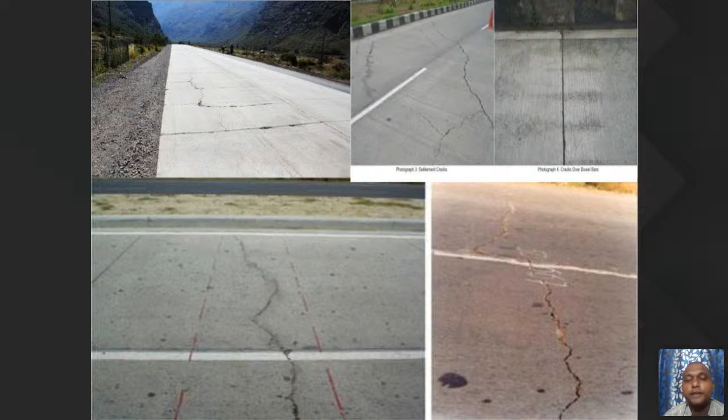Not only in buildings, if you observe rigid pavements, which are concrete roads—after some years of construction, in most cases, if you see village roads made with concrete, those are rigid pavements. Due to vehicles moving and increasing load, there is a lot of crack creation. Once cracks occur in a structure, the strength of the structure decreases gradually.

So it is very problematic, and also construction cost is more, while we have to decrease maintenance cost. Nowadays, repairing these types of cracks creates a lot of expense, and there's no guarantee whether the repair will be permanent. After a year or two, cracks will occur again. That's why we have to create a new technique, especially for sealing or healing these cracks.

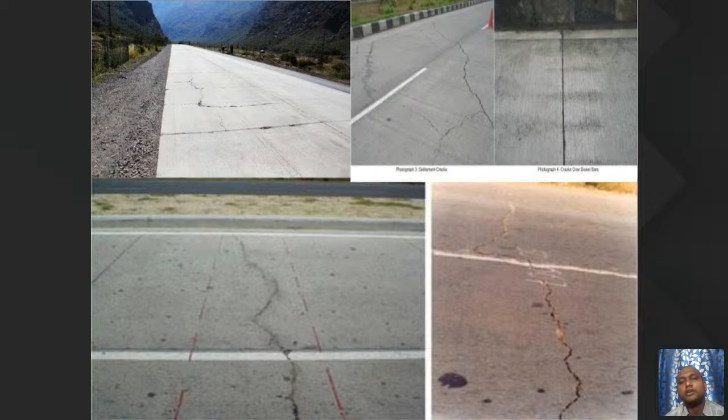We already know different types of cracks, like micro cracks or nano cracks, autogenous cracks, internal cracks, or external cracks, whatever it may be. The main motto of this research is that it's a trending topic in civil engineering. Not only civil engineers, but common people should also know regarding this research.

So let's move on to this slide, the crack repairing system. Whatever repairs we are adopting nowadays: the first is the stitching method, second is epoxy injection, third is cement grouting, and fourth is drilling and plugging. These techniques are used nowadays for RCC structures like buildings, bridges, or any type of reinforced cement concrete structure.

If you observe this, definitely these methods need labor, require a lot of material, and have labor costs—so everything is expensive. That's why we have to come up with a new technique: self-healing concrete or bacterial concrete. In stitching, epoxy injection, cement grouting, or drilling and plugging, whatever it may be, those things are expensive.

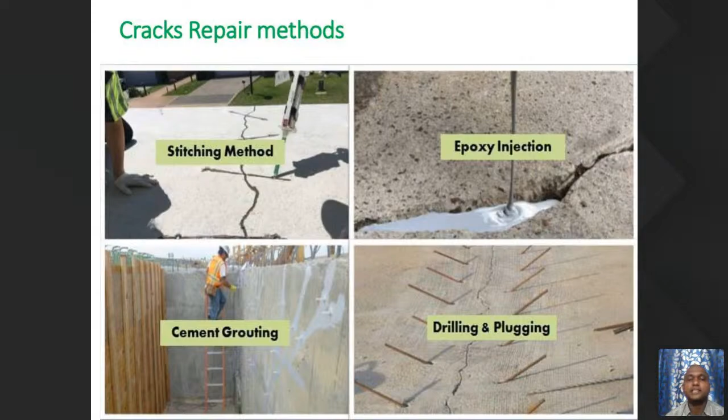We have to analyze the structure, how the crack is affecting it—everything first we have to analyze, then adopt one technique, then implement it. Nowadays, in most cases we use epoxy resins and different types of techniques to repair these cracks. So everything is expensive. That's why we came up with a new technology: bacterial concrete.

If you observe this diagram, for cracks in buildings or reinforced structures, like bridges, there's little we can do. But in a reinforced concrete structure like a swimming pool, if there's any crack, you can see stitching here, and water will move through it. The passage of water increases, creating a lot of problems. That's why bacterial concrete is a need of the hour for society.

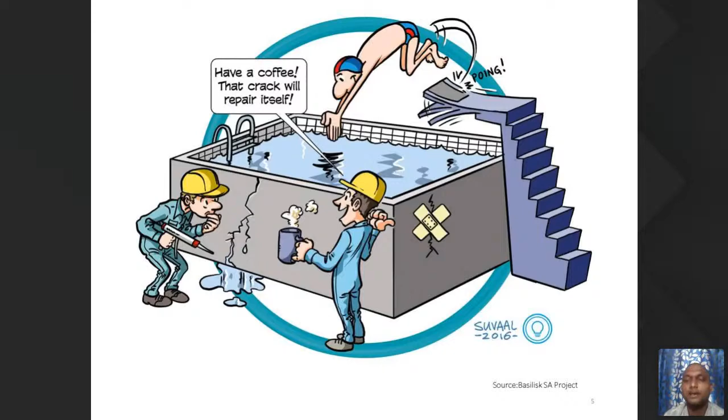If you observe this pictorial view, generally we have different types of techniques that society is adopting, as I've explained so far.

The first thing is, why doesn't concrete heal itself? That means self-healing of concrete - we have to think about that. If you observe a concrete cube or material, why doesn't it heal itself? For instance, when a wound occurs in your body, we apply some treatment, but after some time wounds automatically heal. Why don't we apply the same concept to our concrete? It may be innovative, but most countries are following it, even in India, in Hyderabad we are following this.

Next, what is the need of bacterial concrete? Why are we using it? If you observe recent days, bacterial concrete has emerged as a remedial measure for healing cracks in structures like bridges, RCC buildings, RCC pipes, canal linings, and pavements - including rigid pavements. It has emerged as a remedial measure, meaning it remediates the cracks.

Crack formation is an incredibly common occurrence - everyone knows this happens in concrete, in your building, in your home too. Whenever crack formation occurs in a structure, it permeates water and different chemicals into the concrete through those cracks, reducing its strength. When strength decreases, durability also decreases. Additionally, it affects the reinforcement - whatever reinforcement we use in beams, columns, or slabs - which again gets affected, leading to the possibility of corrosion.

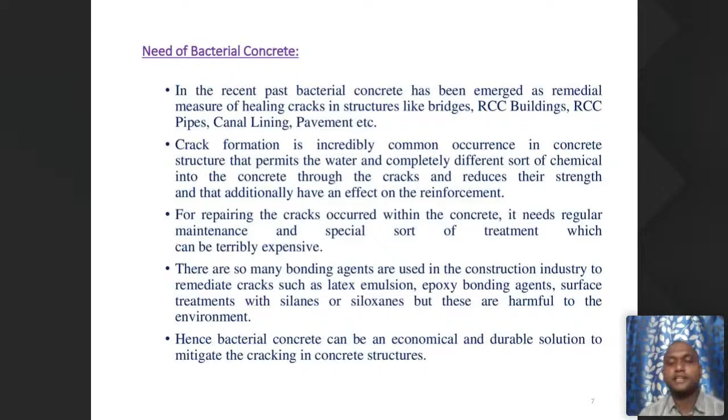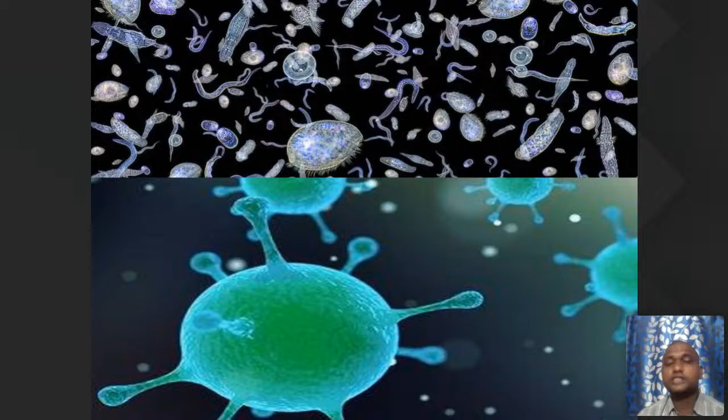This is the type of bacteria, and also where this concept was first started. Coming to self-healing concrete, this bacterial concrete concept was started or introduced by Henk Jonkers. Before Henk Jonkers, there was a professor from South Dakota University in the USA, Professor Ramakrishnan. He also started this, but it wasn't implemented much. But Henk Jonkers, professor from Netherlands, at Delft University of Technology...

...developed this novel technique adopted in remediating cracks and fissures in concrete by utilizing microbiologically induced calcite precipitation, which we call MICP. That is nothing but the technique - we also call it biomineralization.

These techniques we call biomineralization, bacterial concrete, or self-healing concrete, whatever it may be. The major important thing we must know is how calcium carbonate, which is nothing but limestone, forms in between the cracks. That is the major technique.

In this study, experimental investigations have been carried out to arrest cracks in concrete using Bacillus subtilis bacteria and calcium lactate. The complete research uses the bacteria Bacillus subtilis, which is a family of Bacillus. Along with Bacillus subtilis, for the food of that bacteria I used calcium lactate. Both are the most important ingredients, along with the ingredients of concrete design.

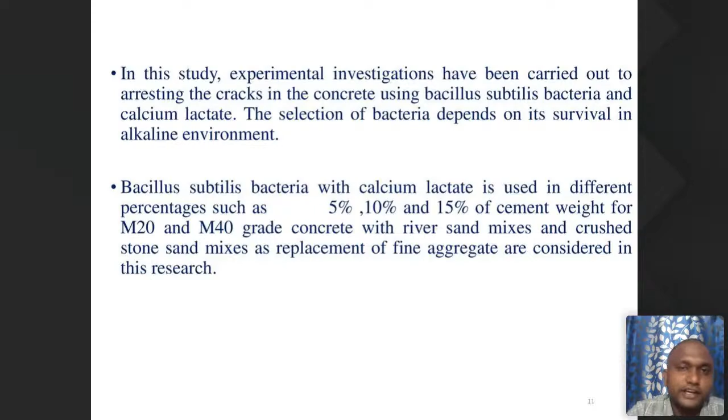I used river sand along with crushed stone sand as a replacement of fine aggregate in M20 grade concrete and also M40 grade concrete. So we used both grades of concrete.

And here, how the experimental investigations are carried out to study the effect of bacteria - everyone knows that whatever concrete we use, first we have to do all the research in our laboratory. So I used research on bacterial concrete, especially on fresh concrete and also hardened concrete.

We know that for fresh concrete there is the slump cone test, compaction factor test, and VB test, whatever it may be. So everything was done, especially on hardened concrete - I performed tests on compressive strength, split tensile strength, and flexural strength of concrete. These three are most important to know the mechanical properties of concrete.

So the physical properties everyone knows, and along with physical properties of cement, whatever we find out, we definitely have to calculate the mechanical properties of that concrete. For this case, as per the code book, as per IS 456 and also IS 516 or 5816, there are different Indian standard codes.

To know the compressive strength, split tensile strength, and flexural strength of conventional concrete along with bacterial concrete, I used the code book IS Indian Standard 516 and also 5816. Especially for the mix design, I used the IS 10262 code book. This is the code book from 2009, IS 10262:2009. Along with that, recently there is a code released from the Bureau of Indian Standard, that is 10262:2019.

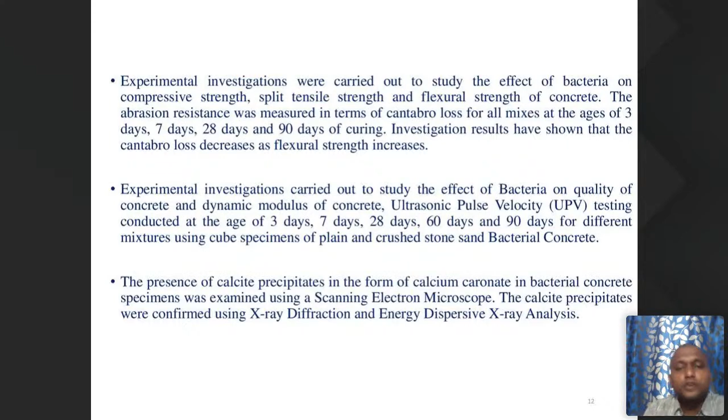Okay, so move on to another slide. First of all, what is bacteria? As civil engineers, we don't know microorganisms or microbiology, we don't know chemistry, maybe a little bit we know at the time of hydration of cement or concrete.

But along with this bacteria, it is very difficult. You must know the microbiology, and you must know the different types of bacteria available, whether they are used for concrete or not. So everything is different. Now, what is bacteria?

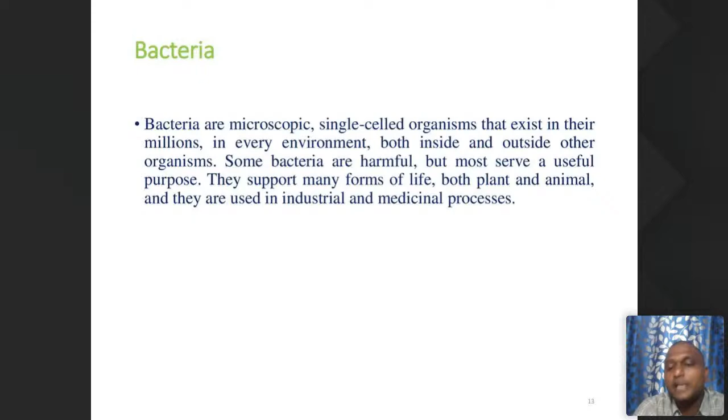Bacteria are microscopic, single-celled organisms that exist in their millions in every environment, both inside and outside other organisms. Some bacteria are harmful, but most serve a useful purpose. Most cases have useful bacteria available. They support many forms of life, both plant and animal, and are used in industrial and medical processes also.

Next, what are the classifications of bacteria? What are the different types of classification? Based on shape, based on gram stain, and based on oxygen requirement, we have different categories. Based on shape: rod-shaped bacteria, spherical-shaped bacteria, and spiral-shaped bacteria. Based on gram stain, there is gram positive and gram negative. And based on oxygen requirement, we have two types: aerobic and anaerobic.

In most cases, as per the literature review and as per the scientists and experts in this field, if you observe Bacillus subtilis or the Bacilli family, it has more strength to survive and also to create calcium carbonate. This calcium carbonate is nothing but limestone. So there is a possibility of limestone creation in between the cracks, definitely possible with Bacillus subtilis bacteria only. That's why everyone is choosing from the Bacillus family.

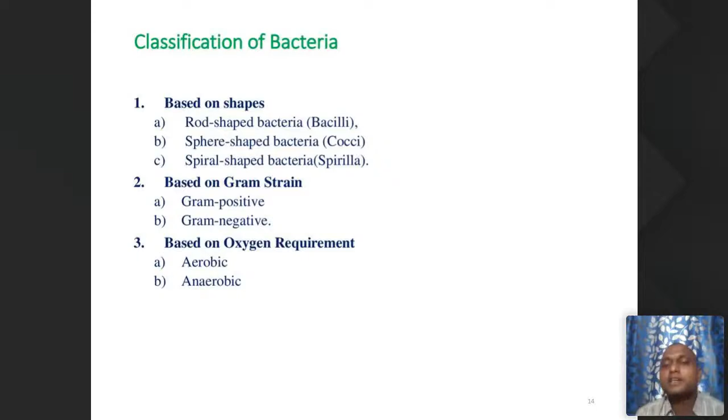Again, within Bacillus subtilis, different types of bacteria exist, like Bacillus subtilis and also Pasteurii. We have different types of bacteria used in concrete from the Bacillus family, nothing but Bacillus pasteurii, Bacillus sphaericus, coli, and subtilis. It's the most important thing. Even I used in my research, Bacillus subtilis, and also Bacillus cohnii, halodurans, etc.

So most of the cases to seal the cracks, especially we are using Bacillus subtilis. It gives immense power and also calcium carbonate, that is nothing but limestone. Okay, moving to next slide.

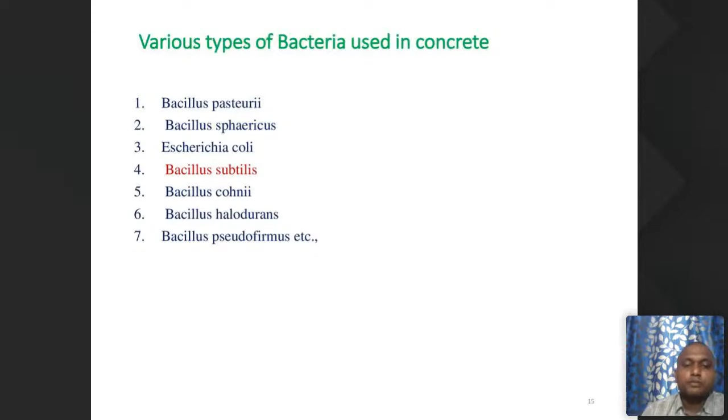So this is the Bacillus subtilis. There is a different procedure, later I will explain. As earlier I told you, Bacillus subtilis is the most available bacteria, it is not harmful, and it creates calcium carbonate within the concrete when you add it along with the cement, fine aggregate, coarse aggregate, and water. So there are some ingredients along with it.

When you add this Bacillus subtilis bacteria, definitely there is a possibility of sealing the cracks. So how will we check that possibility of sealing the cracks? We use the ultrasonic pulse velocity test, otherwise we use microstructure analysis. I will show you the diagrams also.

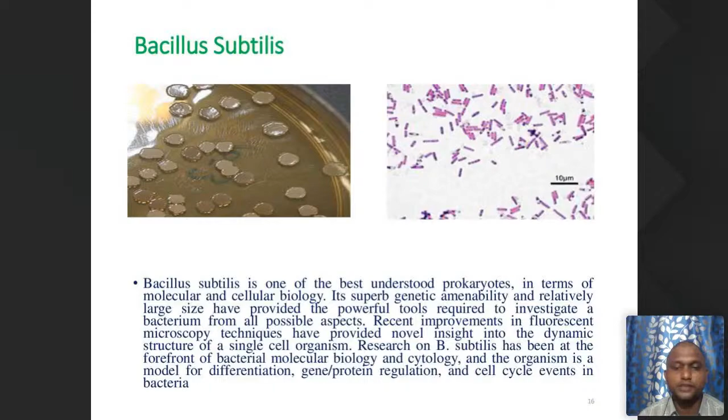Yeah, these are the types, and everyone knows as civil engineers there is a possibility with water cement ratio. If you create a water cement ratio as per 10262:2019 code book, if you add more water, definitely there is a loss of compressive strength. That's why if you follow the water and cement ratio as per the code, definitely the strength is more. Otherwise it is difficult to maintain the compressive strength after some years. That's why most structures nowadays are creating cracks, deterioration is more, durability is not good, and lifespan is very less.

Okay, that's why while preparing the mix of concrete, we use different grades like M20, M30, M40 grade. Even for high rise structures, most cases we go for high grade concrete, but basically we start from the M20 grade concrete. If it is a rigid pavement, definitely we start with M30 grade or M40 grade concrete.

That's why whenever you prepare a mix proportion, you must follow code books as per the Indian Standard and Bureau of Indian Standard code books. If you are a foreigner, definitely you follow your own code books. If you are from USA, you have to follow ASTM codes. If you are from Europe, you have to follow Euro codes. Like that, every country has their own code books, especially for the creation or proportion of concrete.

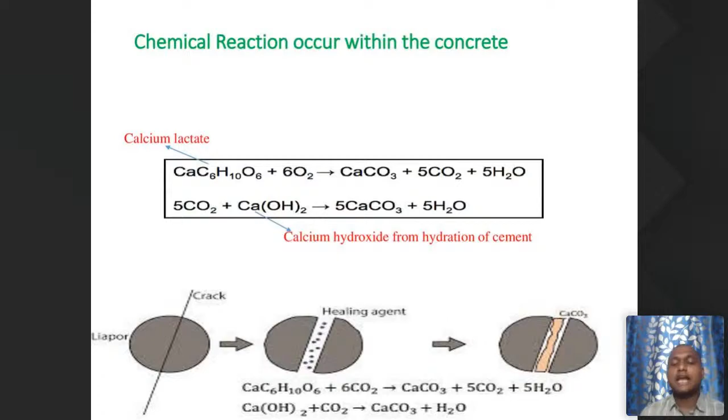Yeah, what is the advantage of this bacterial concrete? If you observe, there are a lot of advantages. The first one is it will improve the compressive strength. Not only compressive strength of concrete - as per my research, along with compressive strength, there is a possibility of increasing split tensile strength and also flexural strength of concrete.

So again, there is better resistance towards freeze thaw attack reduction. Whenever the strength is more, there is a possibility of decrease in permeability of concrete. That means whenever you pour water, the permeability will reduce. That's why if you use this bacterial concrete, there is a possibility of decrease in permeability, reduction in corrosion of reinforced concrete, and also it is eco-friendly.

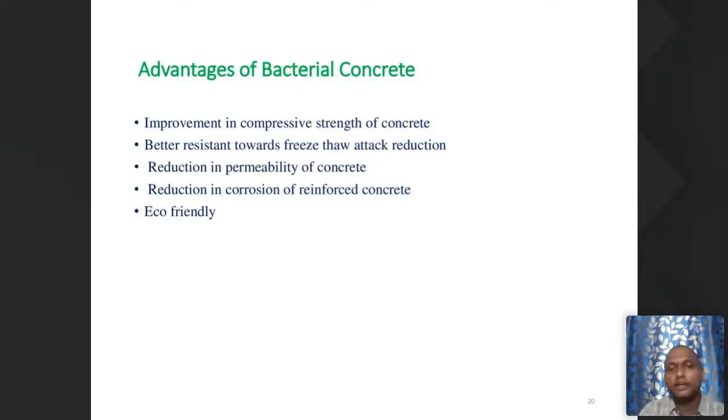These are the advantages of bacterial concrete. Next, the objective of this research, the entire research that I am going to explain, I studied the effect on fresh concrete and also hardened concrete, and we have to investigate crusher sand as an alternative to river sand.

Everyone knows recently in Andhra Pradesh state there is scarcity of river sand. At the same time, the government took a new policy. At the time of government formation in Andhra Pradesh, there was a lot of scarcity, so they stopped the river sand. At that time a lot of builders didn't get river sand, that's why in most cases they used crushed rock sand, which is nothing but M sand. So the properties are very similar.

Next, to study the physical durability of bacterial concrete, that is nothing but the physical abrasion resistance test, I did it as a Cantabro test. It is very useful for your research.

Next, to know the bacterial concrete microstructure, I told you already that is SEM analysis, X-ray analysis, and also EDAX. Next, to evaluate the dynamic modulus of elasticity.

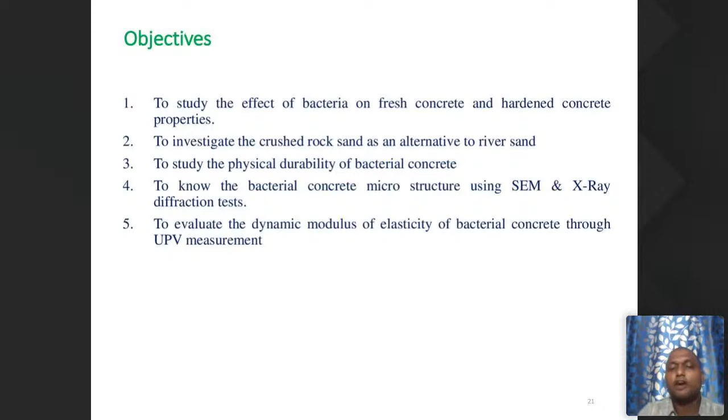Everyone knows we are doing modulus of elasticity on a cylindrical portion. When we do the cylindrical portion at the time of split testing, we calculate the modulus of elasticity of concrete, especially for conventional concrete. But here we are doing it for bacterial concrete also, not that test - I followed the ultrasonic pulse velocity test. This is a very important test.

Next, coming to the characterization of materials. Whatever research we are doing, the characterization of materials is most important. If you don't know the physical properties of your material, it is very difficult to know how the chemical reaction will occur or how the hydration process will happen in concrete.

For that purpose, the cement I used is nothing but ordinary Portland cement, grade 53. So for this research on concrete, I especially used 53 grade cement, which is nothing but OPC. Most of the time in society we call it OPC.

For generally plastering purposes we use 43 grade and also 33 grade, but nowadays no one is using 33 grade. For plastering purposes some people are using 43 grade also, but for the entire research I used 53 grade cement.

And the fine aggregate I used, as I told you earlier, as a replacement of river sand I used crushed rock sand, and I determined the specific gravity as 2.68 and also 2.77.

And coming to the coarse aggregate, we used crushed granite broken stone of 20 mm nominal size. Generally we use 20 mm along with 12 mm chips. In our construction activities also, in most cases we are using 20 mm mixed with 12 mm. The specific gravity of that coarse aggregate is 2.71.

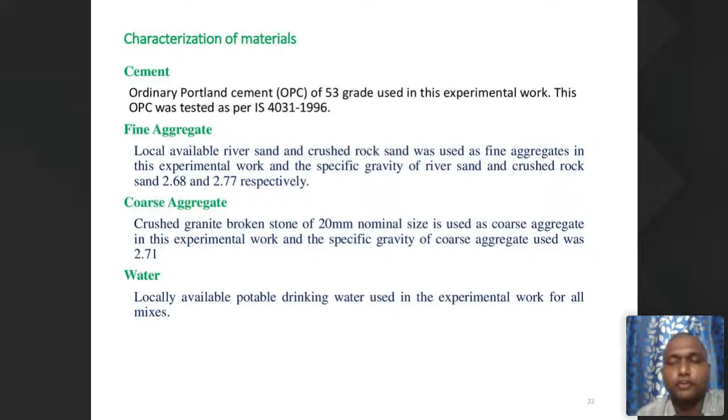Coming to the bacteria, how we develop the bacteria and how the microorganism is developed - that culture of microorganism, everything was done in Hyderabad at a BioLife company, DVS Bio Life Private Limited Laboratory. The culture was isolated in the DVS Bio Life Laboratory and was maintained on nutrient agar slants constantly.

After some days, there is formation of irregular white colonies on the nutrient agar. So when we require a colony of that culture, while incorporating it into the concrete, we have to take a single colony of the culture.

It was inoculated into 25 ml of nutrient broth in a 100 ml conical flask. This setup was maintained at 37 degrees centigrade temperature, and we placed it on an orbital shaker at 125 rpm. This is the most important thing while performing the culture of bacteria. If you don't do all these things, it is very difficult to ensure the bacterial survival, that's why the culture of bacteria is most important.

Along with this culture of bacteria, the medium composition required for the culture used peptone, NaCl, and yeast extract. The peptone is 5 grams per liter, NaCl is 5 grams per liter, and yeast extract is 3 grams per liter. So this is the culture of bacteria.

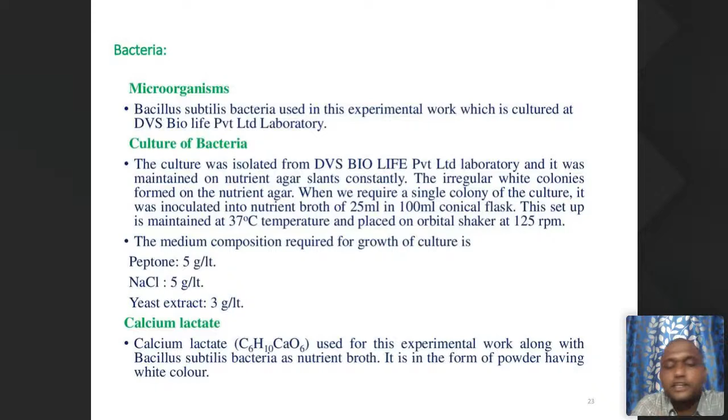Now coming to calcium lactate, which I used throughout the entire experimental work along with Bacillus subtilis bacteria as nutrient broth. It is in the form of a white powder. You can find this calcium lactate in most outside shops, or you can order it online. It is available as a 250 gram pack.

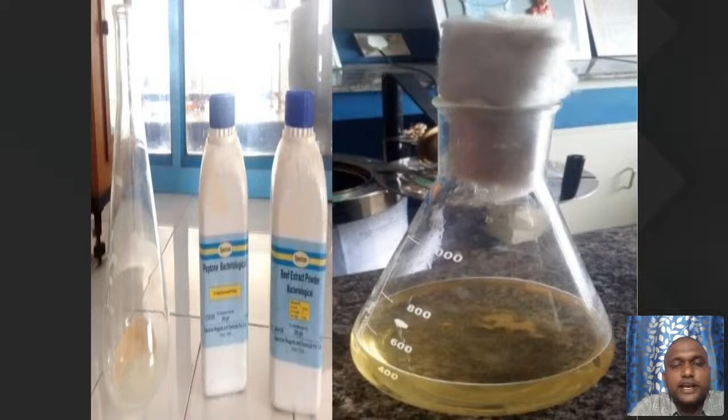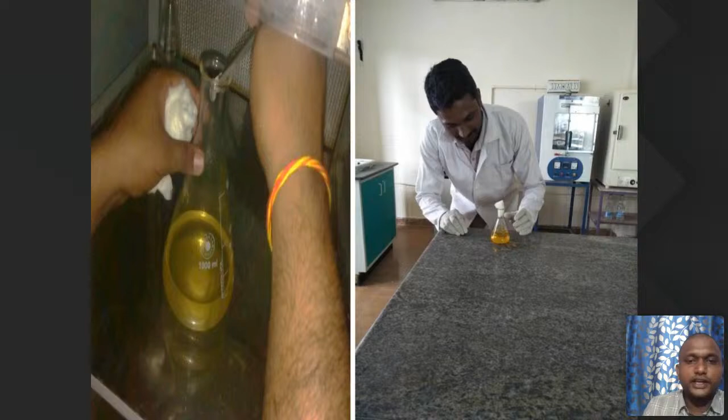Next, if you observe these diagrams, this is the bacterial solution used in most of the cases I performed in the laboratory. After the procedure described earlier, finally we prepared this solution used as 5%, 10%, and 15% of the cement weight of concrete.

These are the types of mixes. How do we perform this type of mixes? I told you we are using different types of solution - the bacterial solution, that is 0% bacterial solution, which is nothing but conventional concrete. At the same time, 5%, 10%, 15% of bacterial solution. So I performed for RBC, that is bacterial concrete with river sand, and at the same time CBC, that is bacterial concrete with crushed stone sand.

The mix design I did as per 10262/2009 code book, for M40 grade concrete. Here, one is the cement proportion, 1.65 is the fine aggregate, 3.23 is the coarse aggregate. This is the most important thing, especially to create a concrete of a particular grade.

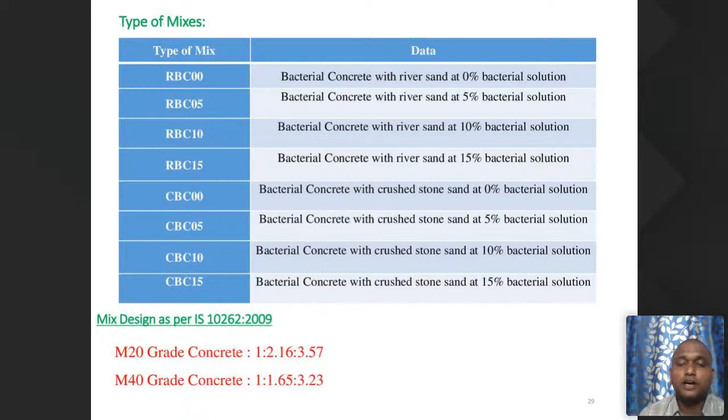And this is the workability test. As I told earlier, if the workability of concrete is good, then only we will use this concrete at the site. There is a possibility issue with workability - if you don't get good workability, there is no proper passage of this concrete into the reinforcement, whatever we do for slabs, columns, or beams. So the workability test is most important.

For that purpose, I used the workability test for both river sand mixes and crushed stone sand mixes. The workability I got was 58 mm and also 55 mm, performed in our laboratory. Once if your workability is not good, when it is zero slump, it is not good for passage and flowability of concrete. Whenever the flowability of concrete is not good, we don't use that type of concrete for construction purposes. That's why I performed this test using a slump cone, called the slump cone test. It gave good results.

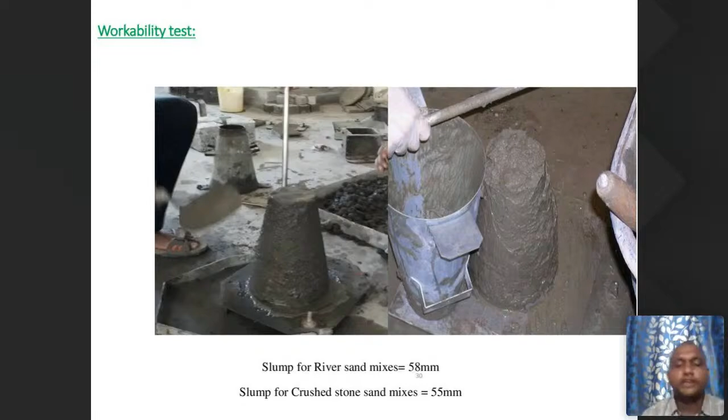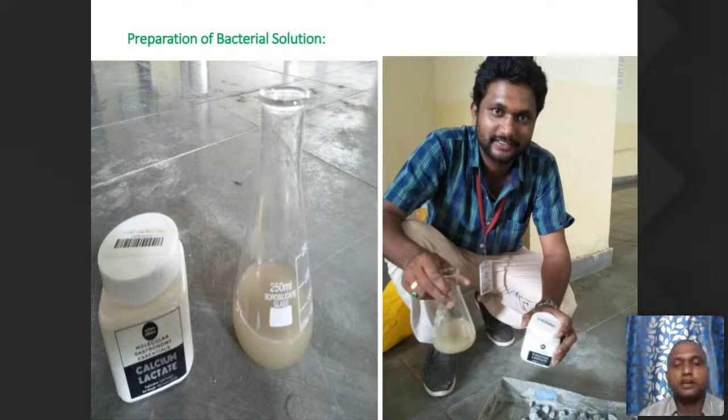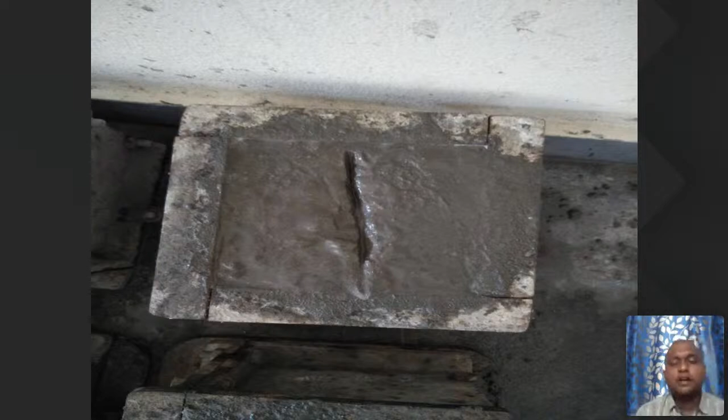This is all preparation of bacterial solution. As I told earlier, there is calcium lactate in white powder form, and I added it here like 5 grams, 10 grams, 15 grams, matching the respective percentages. Once it changes color to brown, we have to add it at the preparation stage of the concrete.

Even before going to the microstructural analysis and mechanical properties of concrete, I performed something innovative. I took a cube at the time of casting the concrete cube. We have a mold, concrete mold, of size 150 by 150 mm. At the time of casting, I created a crack in the fresh concrete while placing it in the cube. After 24 hours, we dismantle the cube and put it for curing. I observed this crack after 28 days - how it developed, I will show you in the next diagram.

You can see there is some white formation, which is nothing but calcium lactate. If you observe the previous slide, the crack is more visible. If you observe this slide here, the grade of concrete is M20 grade.

The crack at the time of 28 days was healed - it was sealed. Why? Because we incorporated bacteria, that is nothing but Bacillus subtilis. At the same time, along with bacteria, I used calcium lactate, so there is a possibility of healing. That's why I performed all the tests up to 365 days, and also did microstructure analysis using scanning electron microscopy, especially to know whether the elements are formed or not - that is nothing but CaCO3.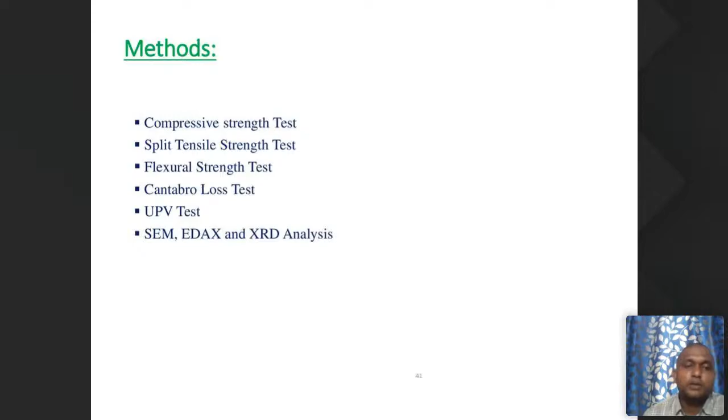These specimens are ready for the structure - for compressive strength and split tensile strength, we used these specimens to know the strength characteristics, that is nothing but mechanical properties. The methods we used include compressive strength, split test, flexural test, Cantabro loss test, UPV test, and also EDAX and XRD analysis.

Coming to the strength properties, the variation of compressive strength of bacterial concrete with curing age for river sand, and at the same time crushed stone sand. If you observe these diagrams, the first one is M20 grade concrete for river sand, the second is M20 grade concrete for crushed sand mixes. Same like that, M40 grade concrete for river sand and also crushed stone sand.

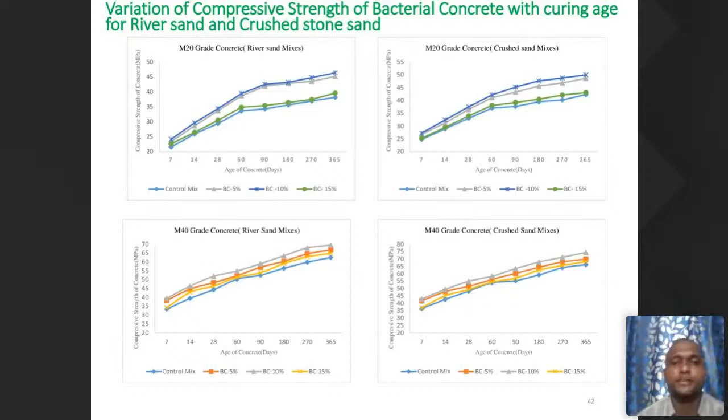If you observe here, there is a possibility of increasing at every level. The first graph, M20 grade concrete, is at 7 days, 14 days, 28 days, 60 days, 90 days, 180, 270, 365 days. I took the specimens, casted the cube, same like that - we did experimental work at different stages from 7 days to 365 days. There is a possibility of increasing at every level.

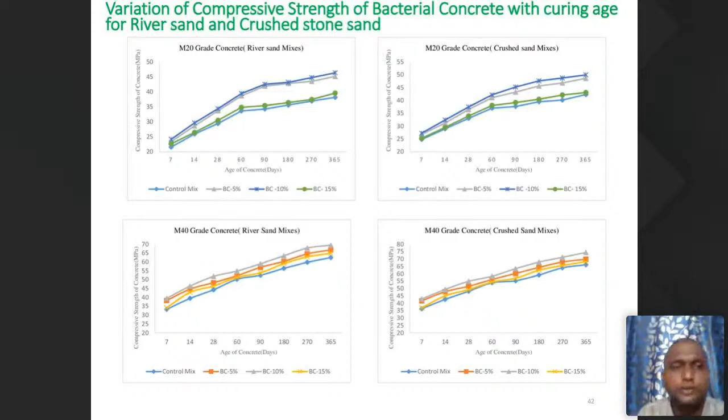That means the possibility of increasing strength is because whenever bacteria or calcium lactate is added into the concrete, there is a possibility of reducing the permeability of that cube or structure. So whenever permeability decreases, that means there are no voids - definitely the voids are not there, so there is a possibility of increasing compressive strength. Even for our research, if you observe for the 2 grades, there is an increase in strength.

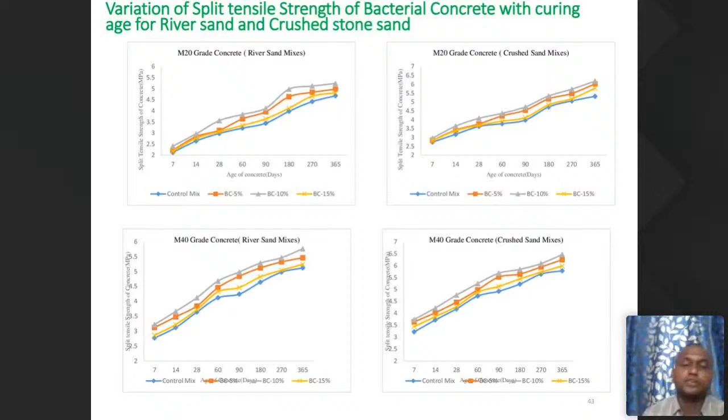Same like that, the split tensile strength also increased from 7 days to 365 days, especially for M20 grade and M40 grade as a replacement of fine aggregate - while we used river sand, here we also use crushed stone sand, that is nothing but M sand. Same like that, the flexural strength.

The flexural strength we performed in UTM, Universal Testing Machine. We casted a beam of size 10 centimeter by 10 centimeter by 50 centimeter - that is nothing but 100mm by 100mm by 500mm. If you observe our cube strength, we casted a cube 150 by 150 by 150 size, and the cylinder is 150mm diameter and 300mm height.

The same thing we casted and dismantled, and we kept it for curing purpose at different stages from 7 days to 365 days.

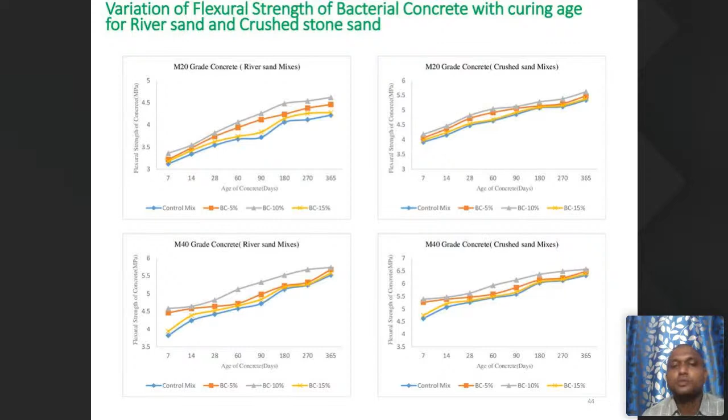Then we performed a test on compression, split, and flexural strength on hardened concrete. We got some results, and there is definitely a possibility of increase in strength.

Next, coming to the abrasion resistance of bacterial concrete using the Cantabro loss test. This test uses the Los Angeles equipment. As per IS codes, this equipment is normally used for aggregates, but as per ASTM code, the Los Angeles equipment is used for the Cantabro loss test to determine the physical abrasion of concrete.

For this purpose, we maintained around 32 revolutions per minute and cast different types of cubes: 100 mm diameter, 150 mm diameter, and 100 mm height specimens. We cast 3 specimens of each type. Normally for aggregates, this equipment uses iron balls, but for the Cantabro loss test, we removed the balls.

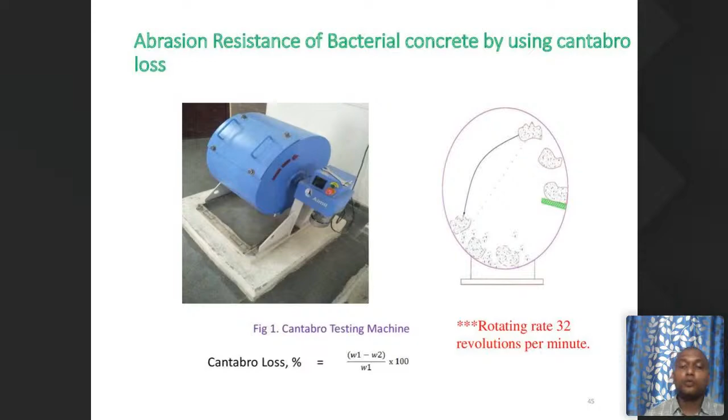We placed the 3 specimens into the equipment and closed the door as shown. Then we rotated the machine. Once switched on, the rotating rate was set at 32 revolutions per minute.

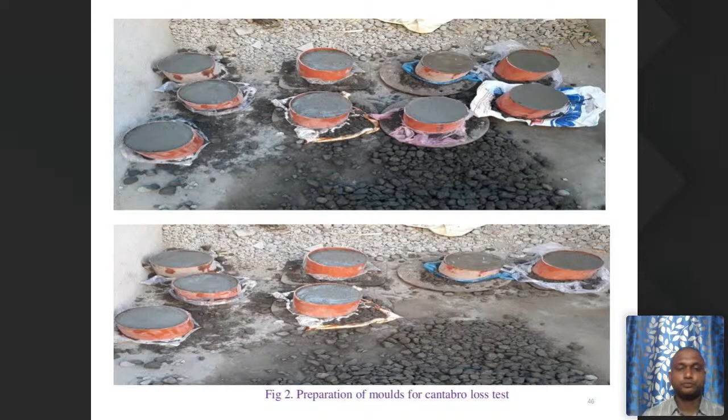These are the specimens we cast: 3 specimens each for river sand mixes and crushed stone sand mixes, labeled BC5, BC10, and BC15, representing 5%, 10%, and 15% bacterial solution of cement weight.

We cast this at every revolution interval. At every 50 revolutions, we took the specimen out, cleaned it, and noted down the value. Then we placed it back in the machine and switched it on for another 32 revolutions per minute. After 50 revolutions, we again took it out, cleaned the debris inside, and repeated this process up to 300 revolutions.

After being kept in the machine, the specimens rub against each other. If your concrete is not good, meaning the quality is poor, they will definitely collide with each other and collapse.

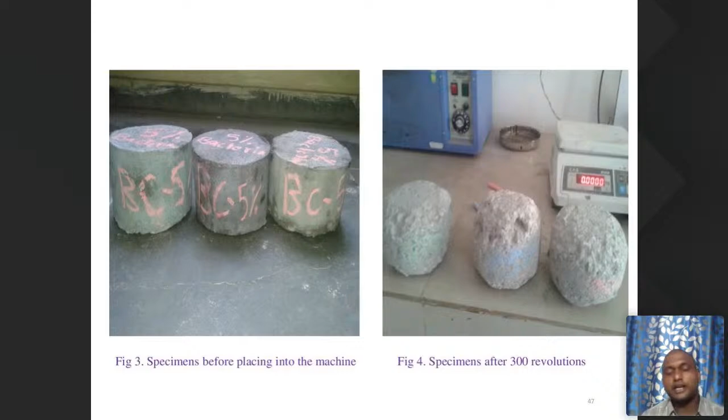The abrasion resistance test is especially performed for roads, that is, concrete roads and rigid pavements. Without performing the Cantabro loss test, evaluating rigid pavements would be very difficult.

These are the specimens before placing into the machine with the Los Angeles equipment. Here you can see how the specimen looks after 50, 100, 150, 200, 250, and 300 revolutions, which is sufficient as per ASTM standards.

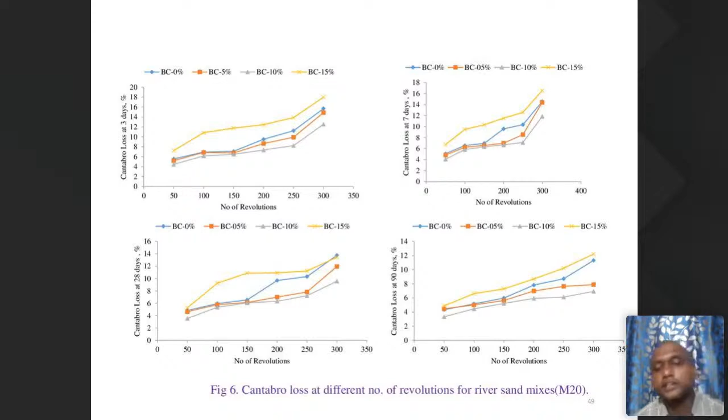These are the tests we performed, with number of revolutions ranging from 0 to 350, though most cases went up to 300. The revolutions are most important here. We performed tests at 3 days, 7 days, 28 days, and 90 days curing periods, only up to 90 days. As revolutions increase, the Cantabro loss also increases. I performed this for both M20 grade and M40 grade concrete, with number of revolutions for river sand mixes shown here as well.

Sorry, yeah, river sand mixes and also crushed stone sand mixes. The Cantabro loss at 28 days for the conventional mix with river sand is 11.36%, with increase in bacterial solution from 0% to 15%. The Cantabro loss is decreased up to 10% solution. This is due to the fact that the presence of calcium lactate is prominent.

Next, the decrease in Cantabro loss at 3 days, 7 days, 28 days, and 90 days are 23.6%, 28.28%, 34.4%, and 47.96% respectively for the river sand mixes. Same for the crushed stone sand mixes, there is a decrease in Cantabro loss of 37.29%, 23.26%, 23.75%, and 48.24% at different ages like 3 days, 7 days, 28 days, and 90 days.

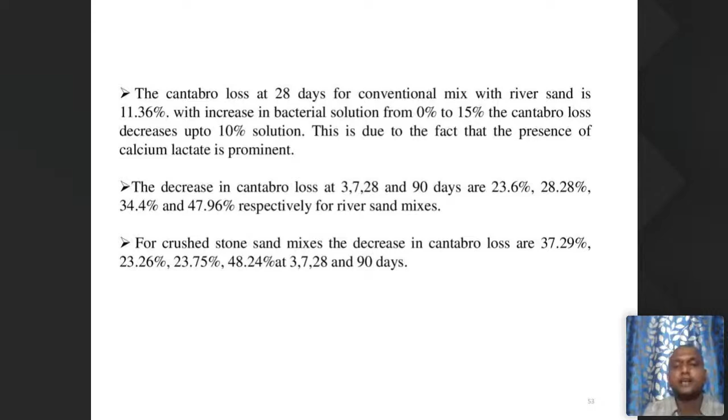Next, the most important test, that is the ultrasonic pulse velocity test on bacterial concrete. It is also a non-destructive testing method, same like the rebound hammer method. Everyone knows the rebound hammer method. By using the ultrasonic pulse velocity test, we know the quality of concrete, and we calculate the compressive strength of concrete, and we know how the crack was formed, what is the size of the cracks formed, everything.